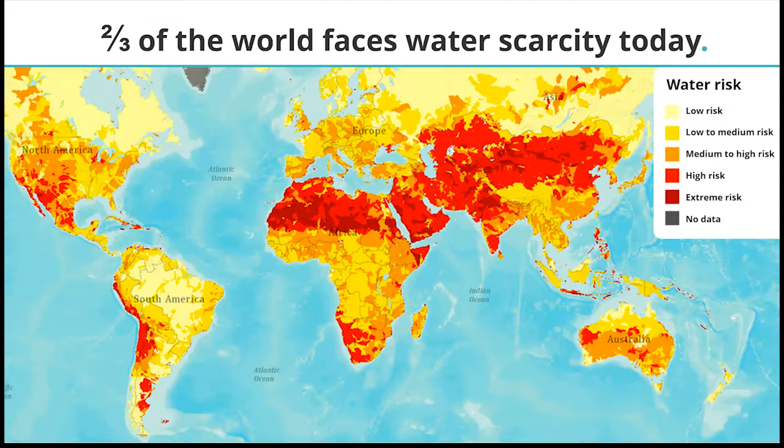So although we might not realize it, water for us, just as much as for these boys in Madagascar, also means life. And in that sense, I have quite an inconvenient message to share today, because there's already 4 billion people, that's 2/3 of the world population, currently facing water scarcity. And you can see on the map, there's a large region in Africa, in the Middle East, in Asia and Australia, but also Latin America and the Caribbean and North America are very vulnerable to the increase of water scarcity. And to me, this is the biggest challenge for humanity for the 21st century, because the difficulty is that the problem is growing.

And of course, you're all very curious to see how the situation is in Colombia. And I found these pictures from the National Study of Water. On the left side, you can see an average year where water is short. And you can see, especially on the north coastline, for example, in Cartagena, Barranquilla, Santa Marta, La Guajira, there's a lot of vulnerable places for water scarcity. So also in Colombia, this is becoming a bigger and bigger problem.

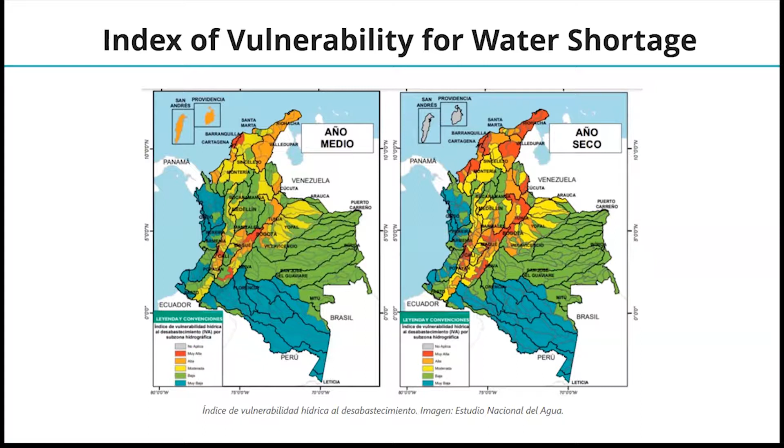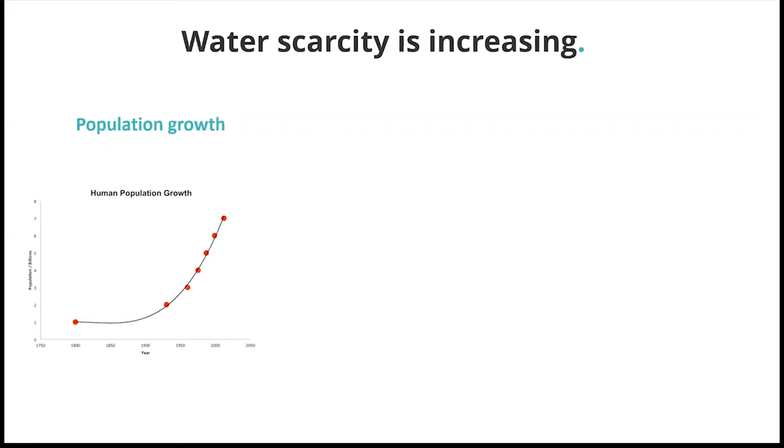And to cope with the problem, first we of course have to understand the problem. So how did we get here? Well, first of all, we are with more and more people, which means that we need more and more water for all those people, not only to drink, but also for their food, for their energy, and for their products. So right now, with the water footprint of all the inhabitants of Earth, we are using 3.5 times all the water that is available, which puts pressure on our natural reserves of water. And because of that, we have lost over half of the wetlands in the past decades. And you can see that groundwater levels in many regions are dropping and dropping.

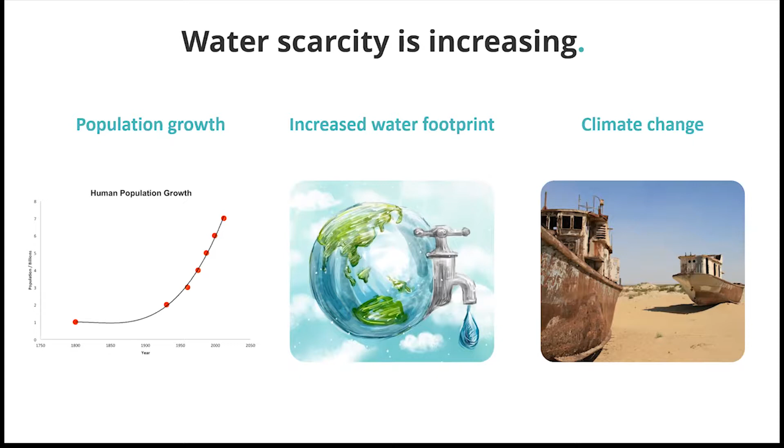And then of course there's climate change. Climate change, changing weather, causing droughts that last longer, but also when it rains really heavy, really strong, the earth is unable to capture this water. So these days, unfortunately, it's not a question if there's going to be a drought this summer, it's more the question who's next. And this year, currently, there's enormous droughts in India, in Australia, there's droughts even in the Netherlands and in Europe. We have droughts in Latin America and in the Caribbean, but also again in California. So it's becoming a bigger and bigger global issue.

But fortunately for us, the good news is that if we look at the surface of the Earth, 70% of it is covered by water. So there's a lot of water. The problem is that most of this water is salty seawater, 97%, only 3% of our water is fresh. So as a water engineer, if I look at these numbers, the key to me to get access to more water lies in the sea.

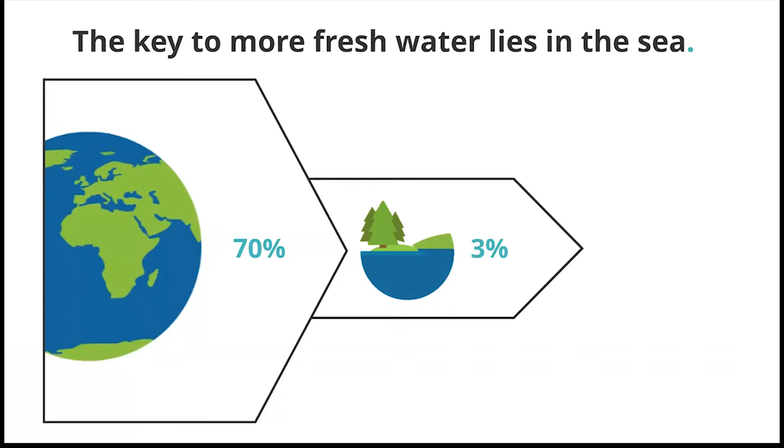And this process is called desalination. And desalination is nothing new. It's been done for decades. If you go, for example, to an island like Aruba or Curacao, you will find that all of the water they use is desalinated. Also in San Andres, there's a lot of desalination.

But desalination is very expensive because it uses a lot of energy. And if energy becomes expensive, then of course your water becomes expensive as well. But also the energy used for desalination comes from fossil fuels, which means that we actually contribute to climate change while we're actually trying to fight water scarcity. We're making it worse by this. So we find ourselves in a vicious circle.

And then lastly, it's technology that is considered as complex, difficult to maintain, and only suitable to be used on small scale applications. Well, these are the three barriers that my company has been studying with the ambition to overcome them, basically. So we ask ourselves, how can we get fresh water today without limiting tomorrow?

And I have a little video here, but I think the audio is not shared. So I'll send you the link later so you can watch it yourself.

But that video basically shows a little bit more about the projects that we implemented and our value proposition, which is, basically our technology couples existing desalination technology with existing renewable energy technology, but then we implemented some extra energy efficient energy recovery technology in it, which we developed, which makes us use less energy for the water. So what we can do is we can provide water for 70% lower than the conventional desalination. It uses only sustainable resources, so only the sun, so no more fossil fuels.

And that has brought us, over the past 5-6 years as we've been doing this, to many areas of the world. As you can see, these are some of the projects that we've finished. Currently, we're operational in 14 different locations. So this is a little bit old map. We're currently also executing a project in Chile, and we expect that soon we will also, together with the UCC and Oceans of Energy, execute projects in Colombia as well, which is of course the reason why we're all here today.

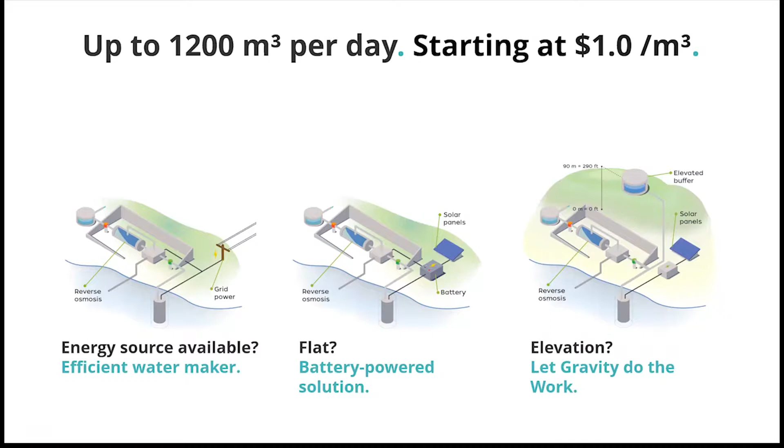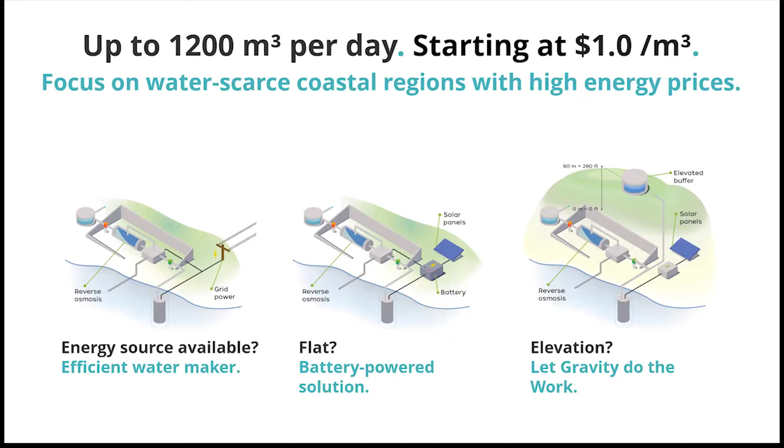So about the technology, there's 3 different options if you're looking for water from the sea, which is really our focus. So we focus on regions that have no more freshwater resources, because desalination, it's a necessity. You only do it if you have to. If you have freshwater resources, you are fine. But if you don't, you can turn to the sea to get more access to water. So coastal regions next to the sea that have high energy prices could benefit from this technology. So let me take you through the 3 options we offer.

The first one is, for example, if you have electricity available. So if you find yourself in Santa Marta, for example, and you run a hotel that is next to the ocean, and right now you're paying the trucks to bring you water, and you pay them like 10,000 pesos for a cubic meter, you can make water for less than half of that yourself using this device. So this device is able to generate 11,000 liters per day, and it uses only 2.2 kilowatt hours per cubic meter of water. And for your understanding, if you use conventional desalination, this number is between 7 and 10. So it uses at least 3 times less energy. And that, of course, enables you much cheaper water.

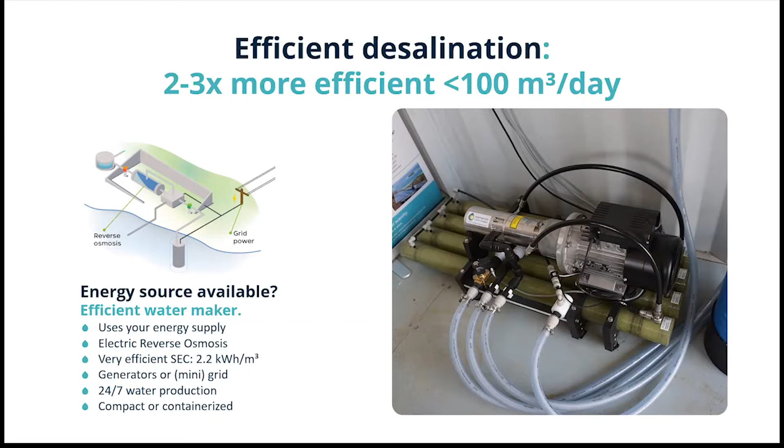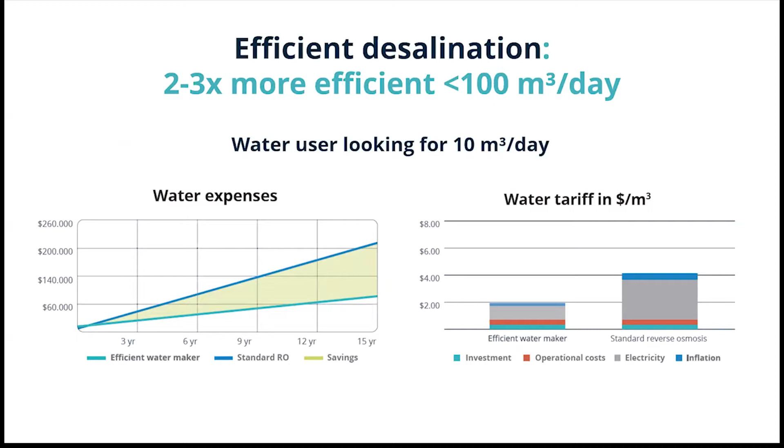This unit has an automated fresh flush. So if it stands still, there's some fresh water that is being flushed through the membranes, making sure that the membrane lifetime is maximized. There's remote monitoring included, and it's really easy to operate with just a single button. So if you look at the economics here, you can see a comparison between a standard reverse osmosis unit and an efficient one. And you can see that your operational expenses are much lower because of the lower energy expenses, which leads to much lower water prices. So we're at around $2 for a cubic meter. And that can be done for 1, for 10, or for 100 cubic meters per day.

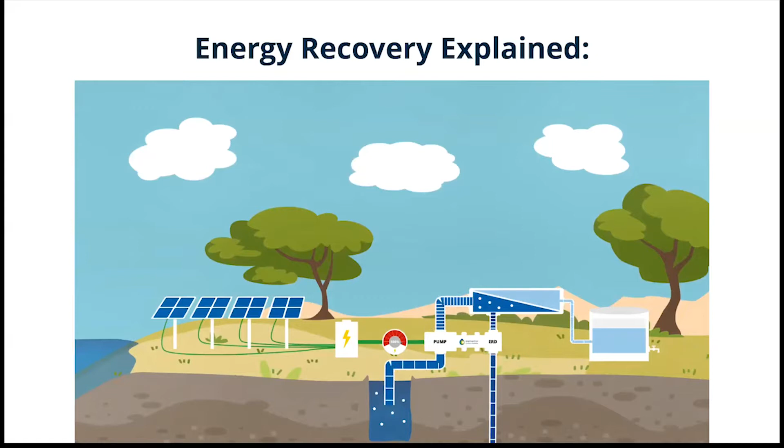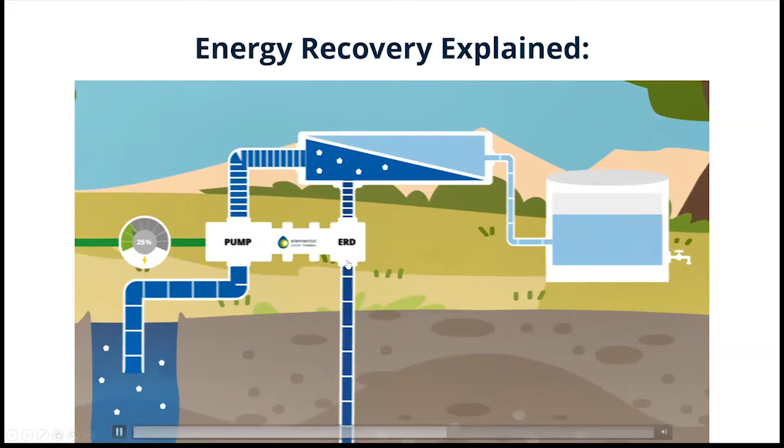So how this technology works, I also wanted to show you a video. I think actually without the sound, let me explain it to you. So all the required energy comes from the sun. The amount of energy that we need is reduced by 75% by using energy recovery technology. This technology uses the residual energy from the saltier brine flow leaving the reverse osmosis membrane. This means we can do with 4 times less solar panels. So it's just by using waste energy more efficiently that we can reuse this energy and need less energy.

And for example, in Belize, on the most private island in the world, you can get access to this kind of water, but you do have to fly a helicopter to get there. So you might need to save up some money.

Then this solution is a totally off-grid solution. So this one is very interesting for communities that both don't have water and don't have energy. It's standalone. For example, this unit here is in the Philippines, and such a single kiosk can desalinate up to 5,000 liters of drinking water from the sea using only those 12 solar panels, which means it could feed a population of 2,500 people with a single water kiosk like that. And the water price is also below $3 US for 1,000 liters of drinking water, which is quite affordable.

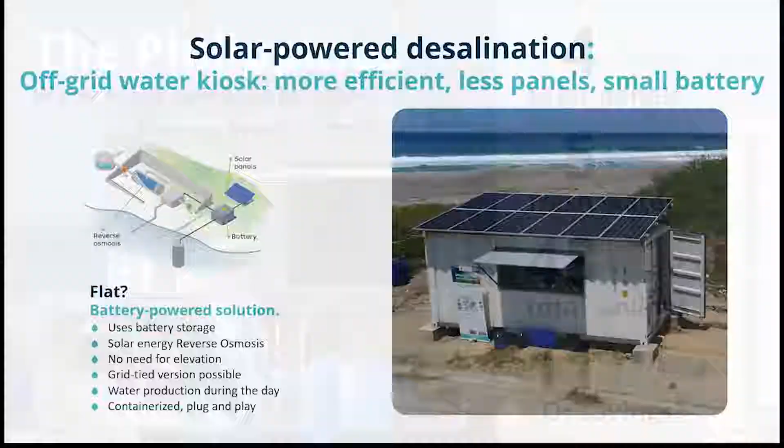So we train the people to operate and maintain the system, and then distribute the water using those jerry cans you see just in front of the container. And if you do have energy, you can also double the water production by coupling it to the grid at night. And it is plug and play. So you just bring the container there, you open it up, and then you just need access to the sea, and it can start working. This is one in the Philippines.

And yeah, this is the third one. As an engineer it's the most interesting, but it might be too heavy to explain. Reverse osmosis uses pressure, and what we do here is that we store pressure by pumping seawater to a hill. So during the day we use solar energy to pump up seawater to a hill, and at night we use the same seawater to operate the reverse osmosis unit 24 hours per day. So we only have the sun, but we make water 24 hours per day using only gravity. And because there's no energy conversion losses in the system, it is a very good energy performance.

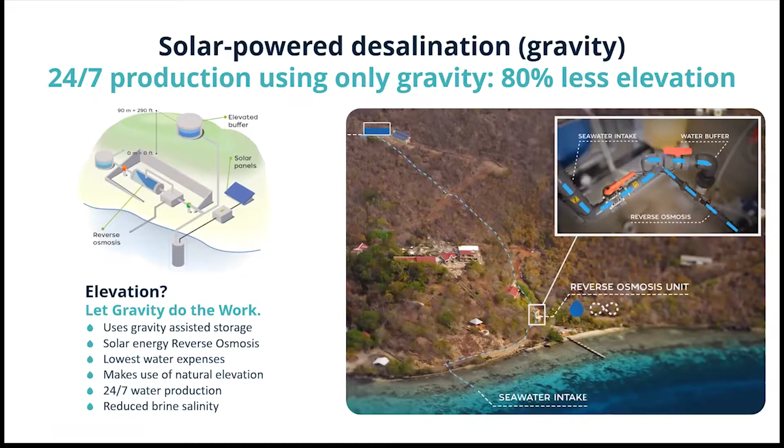But the downside is that you do need elevation. So you do need access to 90 meters or 290 feet, which is 80% less than you needed originally, because also here we developed this energy recovery technology. So for example, this one is in the Virgin Islands, and it has survived the impact of Hurricane Irma. And that work hasn't gone unnoticed.

So the adventure started from the chieftains, from the boys in Madagascar, and of course there's still a lot of work to do, which is also why we're here today talking to you, because we're looking to work together with different end users of water, but also, for example, contractors and constructors of solar panels, foundations that do good work in remote communities. And we can look into providing water as a service for larger projects as well. Because for us, at the end of the day, the goal is to get water for all, for communities, for resorts, for private properties, for utilities, for industries, and any other water user that might benefit from this technology.

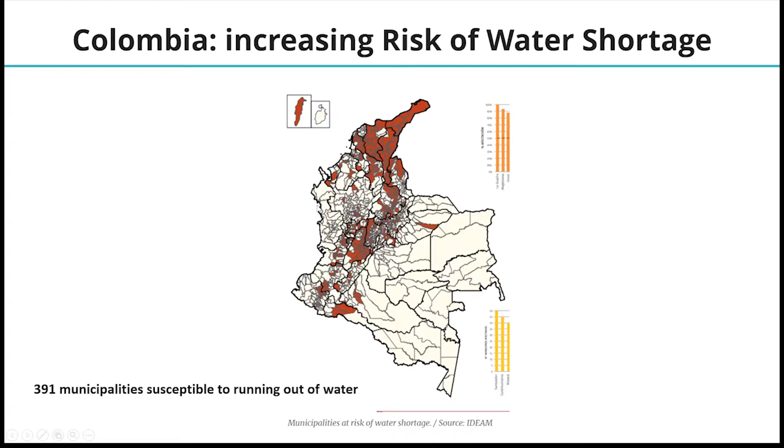So we identified these kinds of regions that we view could benefit from the abundance of the sunshine, and of course the seawater that is basically unlimitedly available, because there are too many trucks driving around in these regions that only displace the problems, that only fill the streets, that only add to the fossil fuel exhaust and pollute the air. While at the same time, if they use the sea and the sun, they can get access to cheaper water without all these negative impacts.

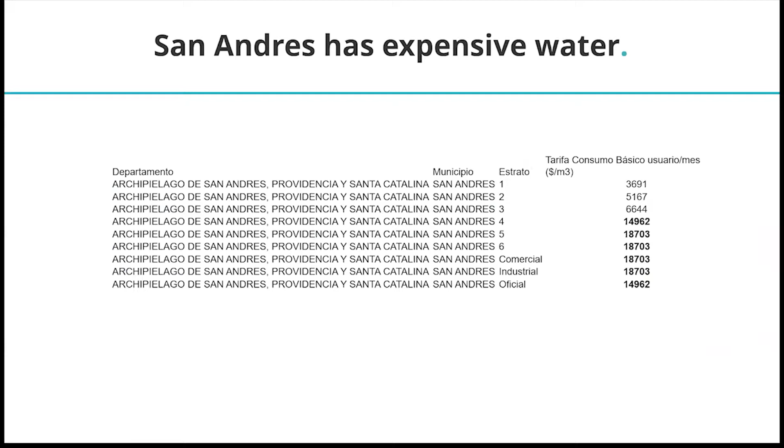For example, San Andres, same story. There's a lot of expensive water being charged; I think the coverage of the island by the water network is 60%, so the rest gets its water by trucks. So also here, there's a lot of savings possible for different end users.

But even in remote regions like La Guajira, the water is such a challenge that the development of the lives of the Wayuu people might be limited, it affects their health, and also limits the availability to grow food. And with climate change also affecting these regions, we believe that it's time to do something. And we're looking together with the UCC and with Oceans of Energy to formulate projects in these regions to help these coastal communities get access to clean water from these unlimited resources.

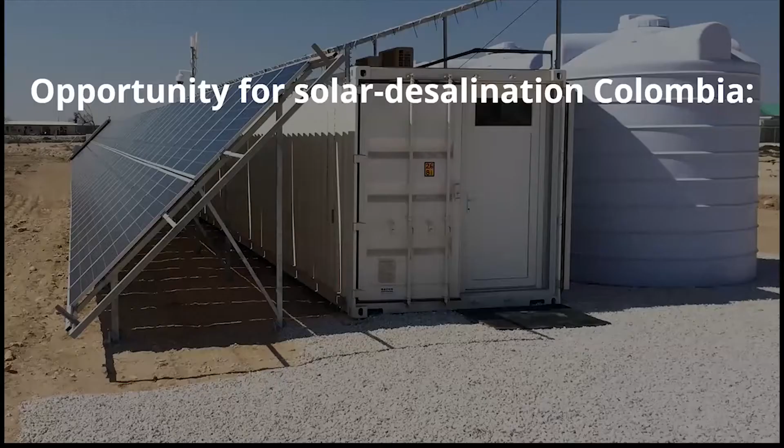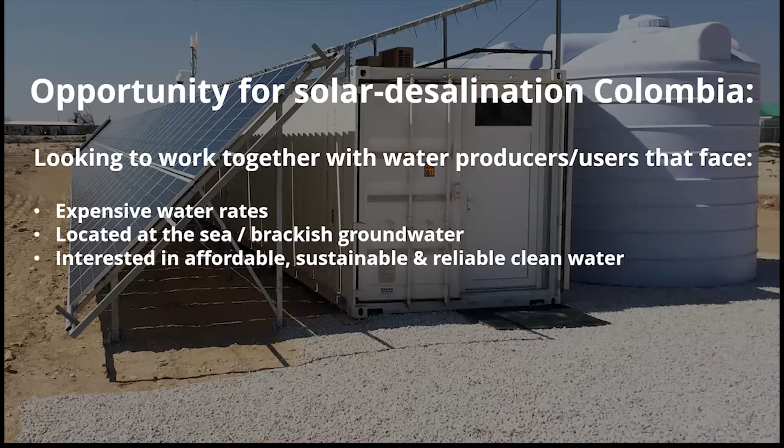So in short, the takeaway for today is that it is possible to use these abundant resources. The technology is mature and available. It can make water at a lower rate. It only uses solar energy. So if there are people interested in such a technology, please feel free to reach out to me, and let's solve freshwater scarcity together. So join us in solving freshwater scarcity using only the sea, the sun, earth, and wind.

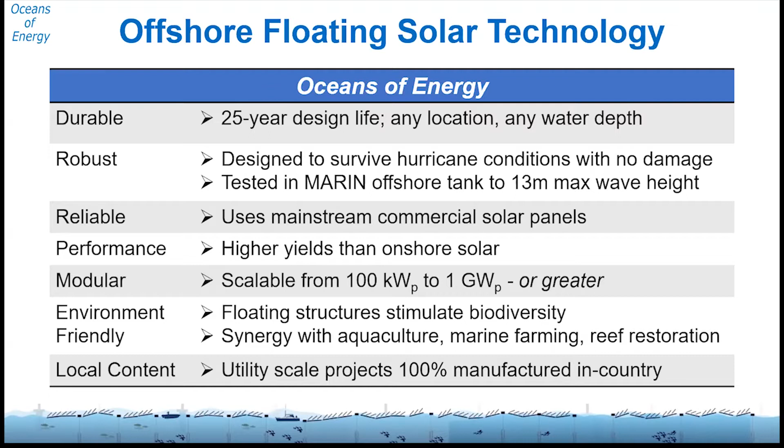Synergies that we see include the floating artificial reef, which means that if you put platforms in the ocean, then other life will attach to it and grow on it, and a whole ecosystem can emerge. Below our platforms, there are possibilities for aquaculture and also for accelerated reef restoration through mineral accretion technology.

In the project SWEET, in which we work together with the UCC and Elemental Water Makers, we aim for reverse osmosis water desalination, so that our system can be used to supply the Elemental Water Makers desalination units with the energy required. By doing so, we can create unlimited drinking water and irrigation water. Also, this water can be used to produce ice, which can be very valuable, for example, for the fishing industry.

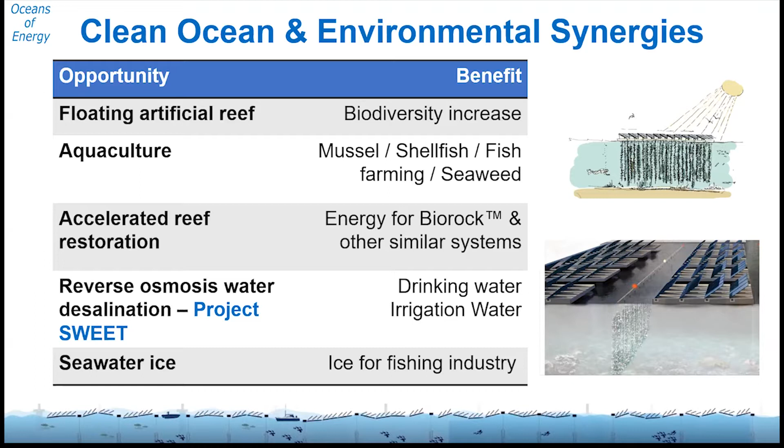Our key entry market is the islands of the world. We see that over 35,000 islands in the world are inhabited, and predominantly they use diesel-generated power. Diesel generators are expensive because, first of all, they're not that efficient. Secondly, they're often not that well maintained. And thirdly, it's very expensive to transport the diesel fuel to these very remote islands and locations.

However, at the same time, it's very difficult for these islands to change because of spatial limitations. Often they can be, for example, very touristic, or they can be full of rainforests. It would be very difficult to cut rainforests or remove the touristic aesthetics by putting solar modules on land.

If we look at the Caribbean, we actually see that it's a very, very promising area for our solution, as it's a very densely populated sub-region, and the average electricity supply costs are above the world average and even above costs of the remote Pacific. This means that there's a lot of money currently being lost with the diesel generators on these smaller islands. However, it's very difficult to change because of the spatial restrictions.

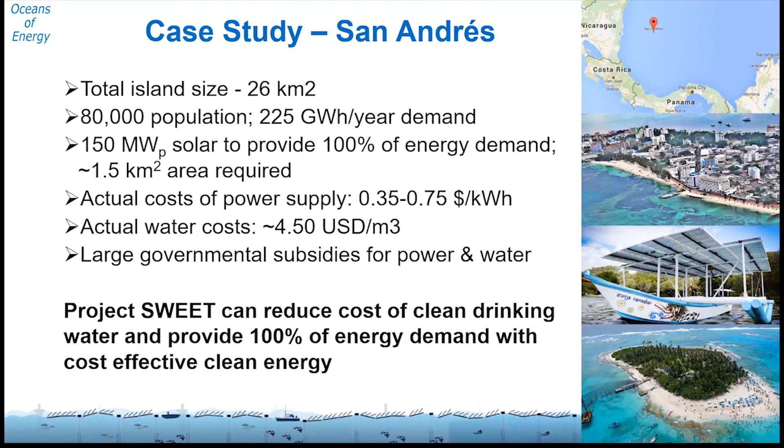This is the project SWEET that we have mentioned. And to the right, you see a brief sketch of how a system would look. It is our ambition to develop solutions that produce unlimited fresh water from desalination, powered by floating solar modules at sea, possibly out of sight, applicable at any coast and at any scale.

And such a solution would lead to 20 plus years of future-proof water supply that's not affected by climate change, and therefore a great additional value for the current water systems. At the same time, it requires a minimum amount of land use as the solar infrastructure is at sea.

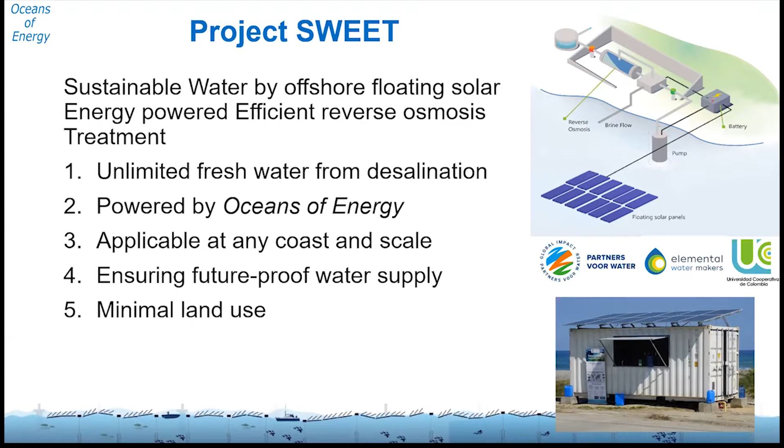With the SWEET project, we aim to provide very large solutions for cities like Santa Marta, Barranquilla, Turbo, and any kind of large coastal community in the Caribbean, including the other Caribbean islands. However, to develop this, we first need to approach it from an innovation perspective. Therefore, we propose to develop a SWEET pilot project, in which we would develop a water desalination unit that can provide water to about 5,000 people at a cost that is above current cost of desalination because of the additional innovation of the floating solar modules, but is still competitive with costs that are currently being paid by the current water systems in some locations.

Also, key to this pilot project is that we include environmental monitoring of the systems, which allows for policy and future permitting development in Colombia. So by showcasing it on a small pilot scale, we want to show Colombia that we can develop it on a safe and very large scale. And then we can develop our production facilities in Colombia, which could lead to very large price competitive projects in the big urban cities in the Caribbean.